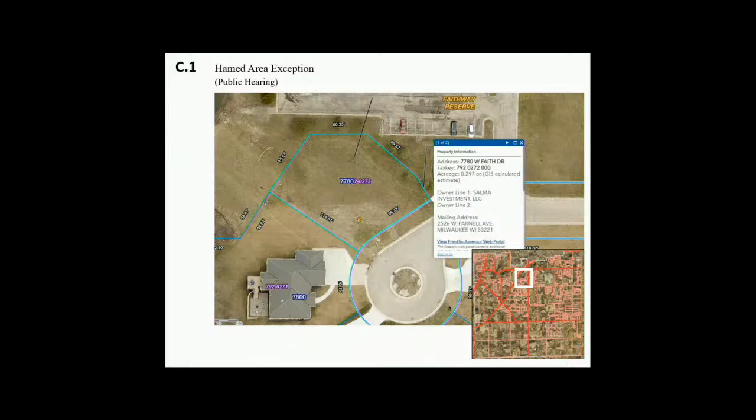And we do need your name and address for the record. My name is Wasim Hamed. The address for now or for the property? The property is fine. It's 7780 West Faith Drive, Franklin, Wisconsin.

The coverage is going to be for the deck. The deck is about 180 square feet, not too big. We have a barn behind the house, it's for us and the church, so we really don't have a backyard to sit at. We need something to sit behind the house, because the ground behind is sloping down for the barn, so there's no backyard, basically.

So fair to say, just for your own family purposes and entertaining others? For family purpose, because there's no backyard, basically. That's all. Thank you. Okay, thank you.

Any other questions or concerns? Okay, Mr. Martinez, do we have a motion? A motion to recommend approval of an area exception to allow for an increased lot coverage of 27.8% for a proposed single-family dwelling, exceeding the R6 as of right lot coverage of 25% for property located at 7780 West Faith Drive. So moved. Have a first, have a second?

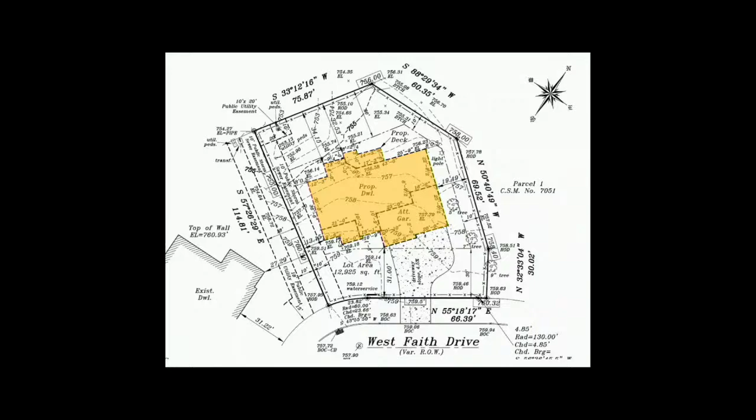All right, then moving on to - apologies, Mayor. What's the meeting date for BZBA, Mr. Martinez? So will this be on our February 22nd? Sorry, the 21st. February 21st will be when this goes before Board of Zoning and Building Appeals. So we'll see you then.

The next meeting is the Board of Zoning and Building Appeals, which is effectively the final approval for your deck. I'll be right here.

All right, then we're moving on to business matters. D1, Croatian Park Pavilion Site Plan, request for approval of a site plan amendment application to allow for the development of a new pavilion to replace the existing stage pavilion and other existing buildings in the northwest corner of the park upon property located at 9100 to 9140 South 76th Street, tax key 884-9995-000.

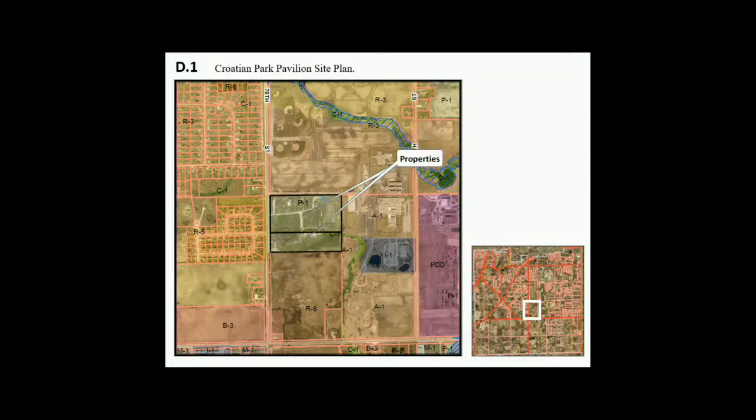Thank you, Chair. So this is for Croatian Park. The property is zoned P1 Park. It's located immediately north of the new CarMax development, near the intersection of Ryan and 76th Street. The existing conditions - it's important to touch on what's already there. Currently there is an existing pavilion. This is not really a change of the way the park is being used; it's a consolidation of the existing facilities and addition of some amenities.

So this proposal tonight is limited to the pavilion development. There are discussions of, and previously approved resolutions for, a turf soccer field, which approval has expired, and a future approval would be required if they wish to develop that. We'll talk a little about how the park is being used tonight, but I want to note that this application is focused on the pavilion itself.

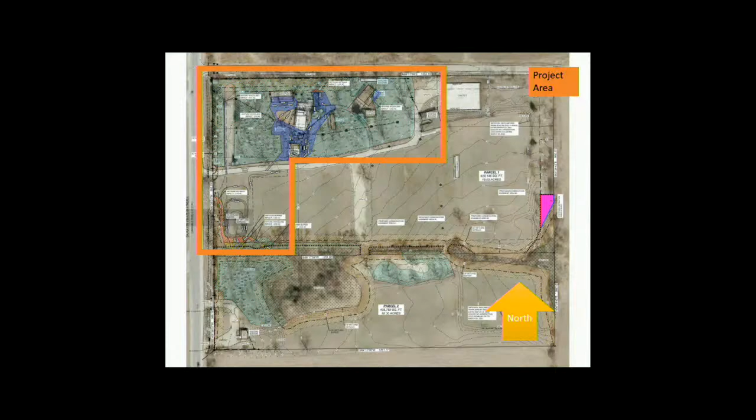So the Natural Resource Protection Plan is here for you and was in your packet. This is the proposed site conditions. We'll look at a detail of this momentarily, but there will be a new pavilion roughly in the middle of the project area, again in that grove of trees, to accommodate just under 300 people.

There's a discussion of parking requirements, and I note that parking requirements are generally driven by occupancy, or the number of people you expect to be using a facility. This pavilion has a capacity of approximately 300 people.

There's a fire pit proposed. The fire department did not have any concerns or commentary about this. There's an additional bocce court, additions to buildings, and then a bathroom which will have a deck on top of it. And again, the stormwater pond.

Let's take a closer look, just so you can see the detail. This is an existing parking area that is unimproved. At this time, it is gravel beneath the trees. All of the parking facilities on the site are unimproved, and we are requiring that this be improved as part of this site plan approval.

The Unified Development Ordinance does require that a surface be paved with curb and gutter. The applicant has already included a curb and gutter in the installation of their stormwater facilities along the western portion. But in order to make good improvement on the overall conditions of the site, we are expecting that they will improve this parking area as part of their overall development.

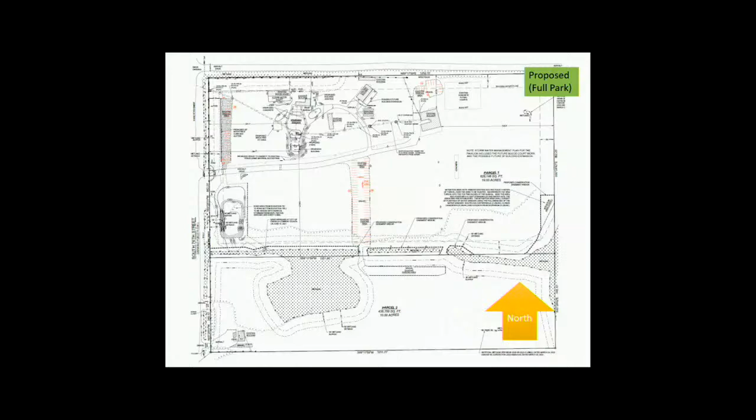There has been a lot of discussion in the city lately about sound. There will be an amplification system for the stage that's here. The applicants have provided us a basic sound study for this and are able to limit the overall volume to within what is allowed by the zoning. So we don't have concerns about that, but we're noting it for the discussion.

Just to note again, there's a previously approved but now lapsed site plan approval that may be coming forward. So recommended conditions of approval are the conservation easement, improvements to the parking facilities, and that conservation easement will have to go to Common Council for acceptance. There are also some minor technical corrections to the site plan - some dimensions that are missing. So broadly speaking, it complies with the requirements of the UDO.

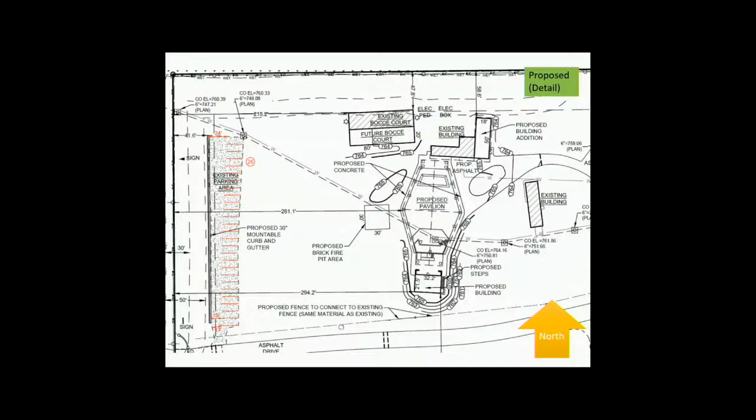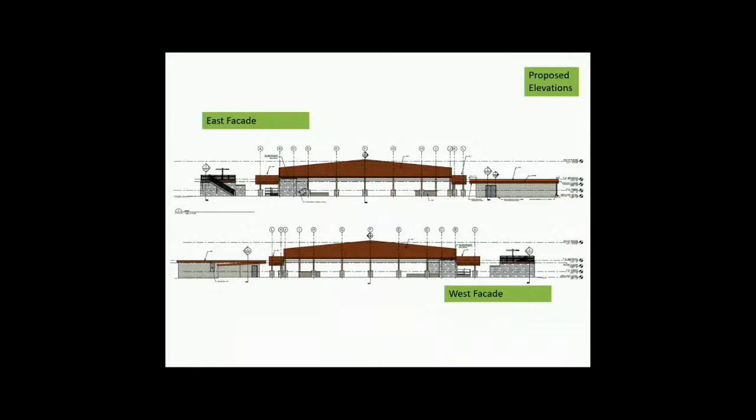It's actually a really attractive building. If you'd like to take a look, we've got the facades from the sides, the east and west. There'll be a nice red roof and stone facades. Overall, it's a good design. We think this is a great project. We just want the parking to look better. So, any questions?

My concern with, you've already addressed the gravel, but my concern with the number of parking spaces, the pavilion that you're building now, roughly 300 folks. Is that more than the current one that you have, capacity wise? Is this increasing capacity? It's basically keeping it the same, and we have more area coverage now for inclement weather.

Okay, and because the other pavilion was smaller, right, you could still have the same number of people, but not under cover. Now they're just under it. And we had a separate weather shelter as well. That's going to become the bathrooms and the deck.

Okay, and then for, Chair, could we get name and address for the record? I'm sorry, Tom Kuzmanovich, 5671 Francis Court, Greendale.

I'm the president of the Federation of Croatian Societies, the applicant. And my name is Tony Zanin from Pinnacle Engineering, 20725 Watertown Road, Brookfield. I'm doing the civil survey project.

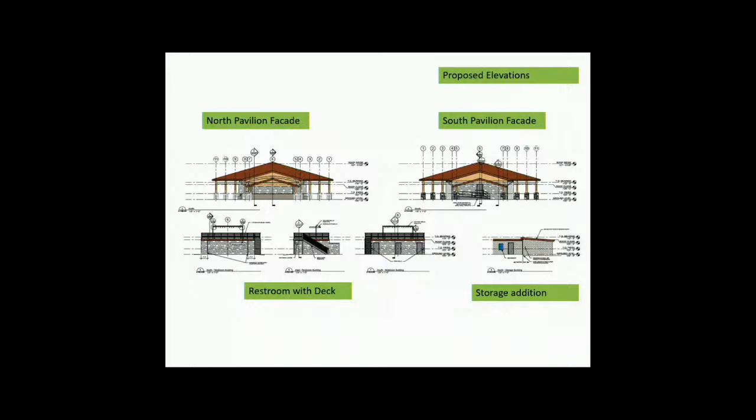I want to say thank you to the commission and our aldermen for supporting us as well. Thank you.

All right, moving on to D2, Rural and Urban Areas Map Update. Proposal to redefine the rural and urban areas as provided in ordinance number 85-860, regulating truck parking and raising animals. This is Mr. Martinez.

The rural and urban map in the municipal code is used to regulate sections for raising animals and parking trucks and equipment. For example, an owner located in the rural area may obtain a permit to raise horses, goats, or sheep, but this is not allowed in the urban area. This is the map we currently have in the municipal code; it was adopted in 1986 and hasn't been updated since. The municipal code has a section allowing this map to be revised from time to time, so staff is recommending an update of this map.

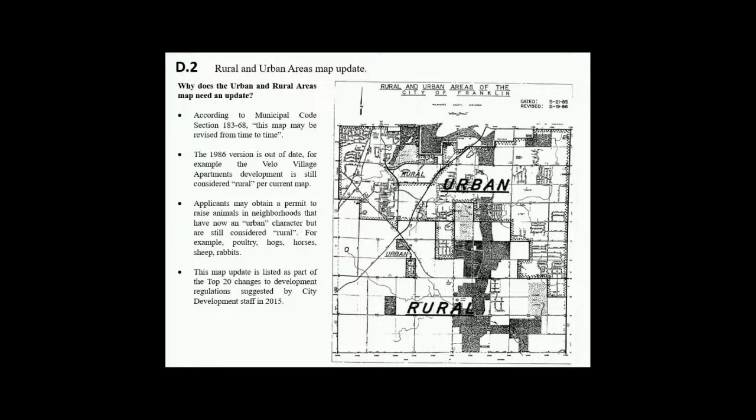We can see, for example, that the new apartments at Velo Village, per the current map, are still considered rural. Property owners in new subdivisions, for example Ryanwood Manor, Cape Crossing, or Park Circle, are also still considered rural, which allows for animal permits to raise horses. That's why staff is recommending the update.

So what's the criteria that staff is using to redefine the new or the addition of urban areas?

Basically, areas served or close to a public sanitary sewer or public water service, new residential subdivisions, and planned development districts are recommended to be added into the urban boundary. Rural areas not served by sanitary sewer and public water, and rural-oriented districts such as the agricultural district, prime agricultural district, conservancy, floodplain districts, park district, and conservation residence district, are to be kept as rural.

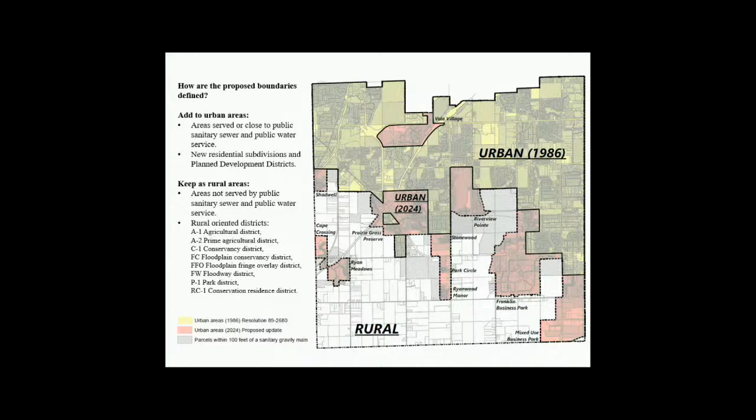So no public hearing is required at this time for this update. Happy to answer any questions you may have, and this will be the map that will be part of the resolution.

Commissioner Haley: Thank you, I just wanted to verify this is the map we're approving. This was the work product that helped us get to this. Correct. So we're not adopting this? Correct. There's some issues in here with areas within 100 feet of sanitary sewer.

If you look along 116th Street on this one, it's showing it hatched because technically that one mile long linear parcel does touch Ryan Road, but the whole rest of it is not, and it's not developable because it's 70 feet wide. Okay, I'm good with that then. This is it.

I just had a quick question. How will staff use this document versus all the other documents that you have? I know animal licensing is one part of it, but since there hasn't been an update since 1986, is a document like this important? For the enforcement of the animal section, yeah, it's important. Okay, so that's the main focus, the animal section, okay.

Do we know offhand how many people's homes would be reclassified from rural to urban that may have an animal that's no longer permissible? We review for active permits. And there's only one active permit. Got it, all right.

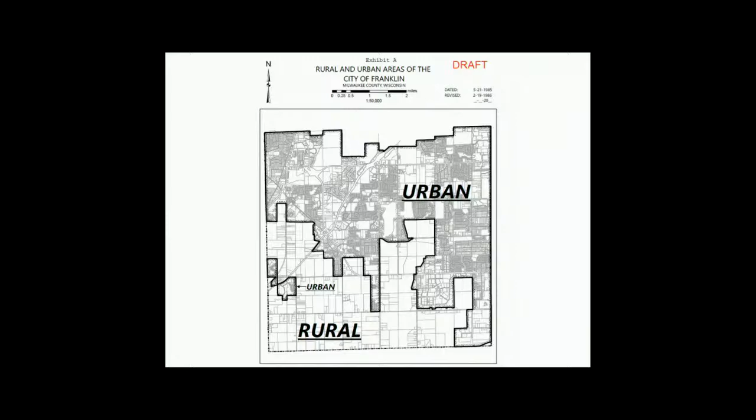All right, moving on to item D4, Franklin Public School District Site Plan Amendment. Request for approval of a site plan amendment for a building addition, parking lot, landscaping, lighting, soccer fields, playground, detached storage building, and stormwater management facilities upon property located at 8225, 8255, 8429, and 8459 West Forest Hill Avenue, tax key 838-9978001. And that is Mr. Fuchs.

So, the Franklin Public Schools has a site plan application. There is a fair amount of modifications to the site: the building addition, new parking lot, multiple soccer fields, a playground, storage building, and some walkways throughout. I'll first note that within the plans, the applicant has alternative bids they'd like to choose from as they get bids for the project.

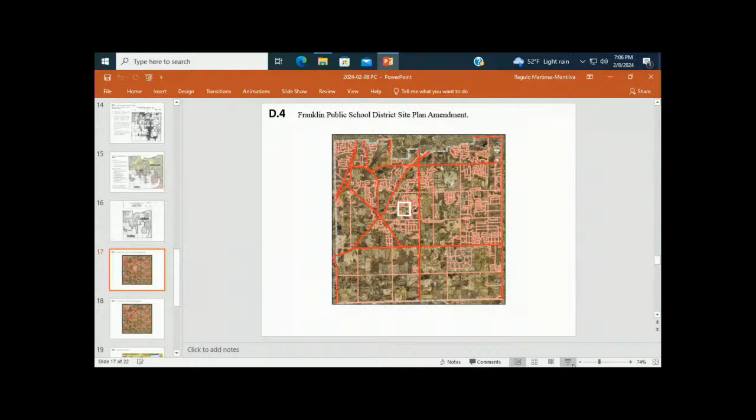Staff has decided to include a condition that those bids be reviewed and approved by staff, and as long as they're in substantial conformance with these plans and those alternatives, they'd be approved. Anything else would then have to come back to the Plan Commission.

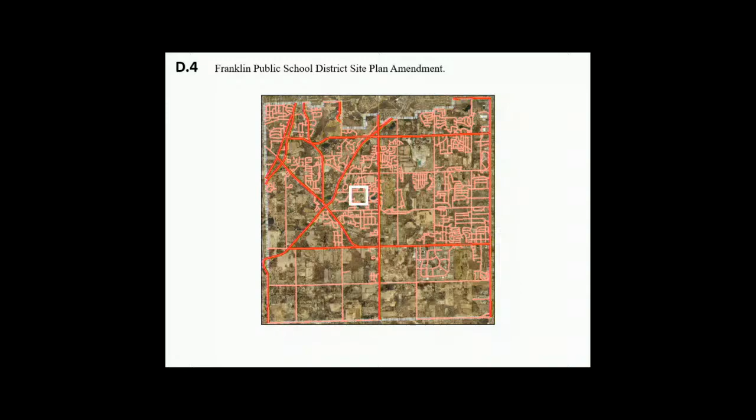The plans also show boardwalks in areas that impact natural resources, wetlands, wetland buffers, and setbacks. Those are not proposed at this time. They provided a note on the site plan, and there will be some corrections made to ensure all of those improvements are shown as not part of this phase. There's a condition that if the school decides to move forward, they'll have to apply for NRSE along with those improvements.

I'll go through the site plan and some of staff's suggestions and recommendations. There is a black vinyl chain link fence with slats around the storage building and soccer field area. Staff's recommending that be a decorative fence similar to what's proposed around the playground area. The building addition as a whole, with the alternative bid, is 15,638 square feet. The parking lot proposed has 122 parking stalls, and staff is not objecting to that quantity.

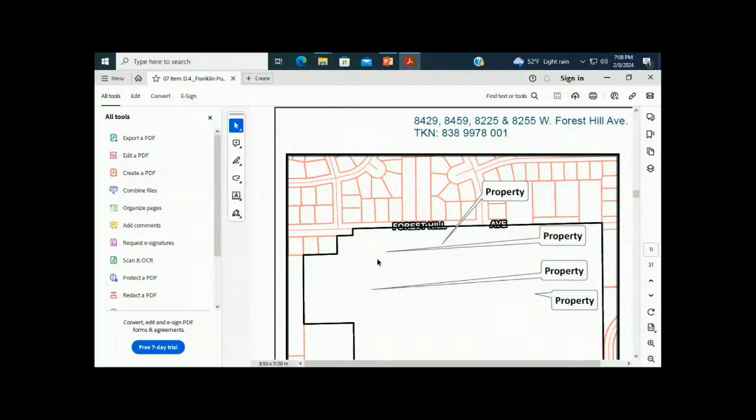There was a conservation easement approved in 2017. That easement has a condition that it be revised, since there were some changes to wetland areas—a wetland actually no longer exists on site, confirmed by a DNR assured delineator. So they will need to revise that conservation easement for the entire site and have it reviewed and approved by the Common Council.

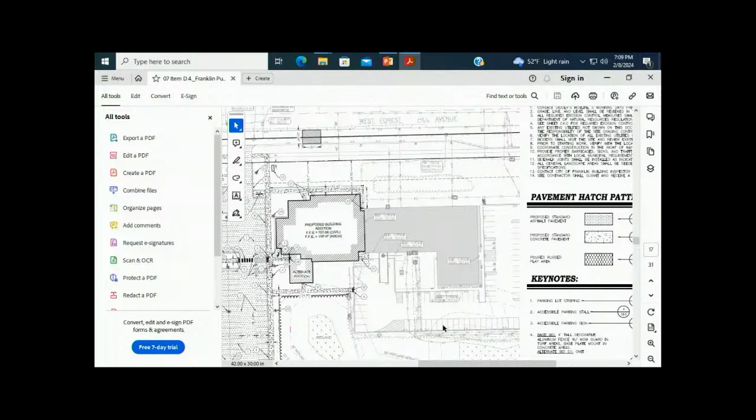Regarding lighting, staff did have some concerns considering the site is adjacent to single-family residential uses. There are 15 light poles within the parking lot at 25 feet. Staff asked if they were dimmable and whether a lower height was considered, which they did, but the applicant pointed out there'd have to be more lights to provide the lighting they're looking for. So just to note, they're not dimmable lights.

The soccer fields are not illuminated. There is a longer response from the applicant regarding the lighting in the staff report, trying to address the glare issue that was brought up. Staff was also concerned with the view of that light source from the adjacent residential neighbors, but the applicant's lighting consultant provided a response and doesn't believe it will be an issue.

The playground is adjacent to the two smaller soccer fields off of Forest Hill Avenue. It's surrounded by a 4-foot aluminum fence. The storage building is then on the other side.

This is adjacent to Forest Hill Avenue. Staff made a comment that the building be relocated, perhaps to the south of the soccer field, so it's not right off the public right-of-way, off the road. We also recommended that metal not be used as a primary building material. So relocating it is a suggestion, as well as the building materials noted in the staff report. Again, the applicant did provide responses that are in the report.

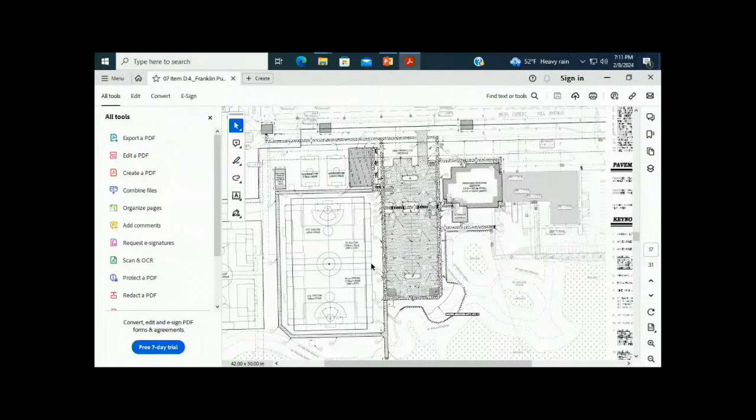Oh, and sorry, I did pass out an email from a neighbor. It's the property to the west, the larger parcel, maybe about 5 acres. They have several concerns with the project, which they noted.

Excellent. I thought that would be bigger. Thank you.

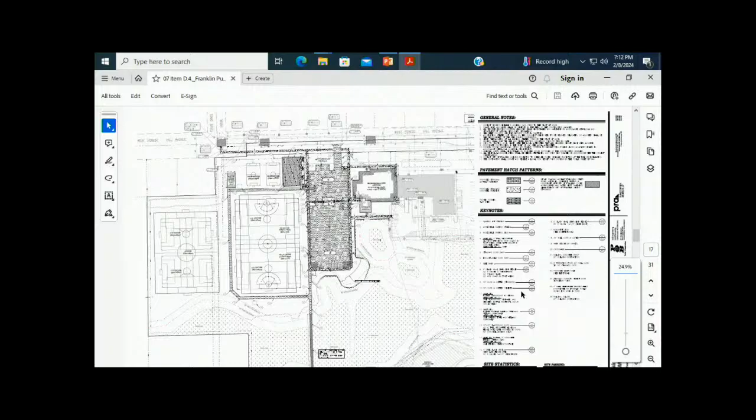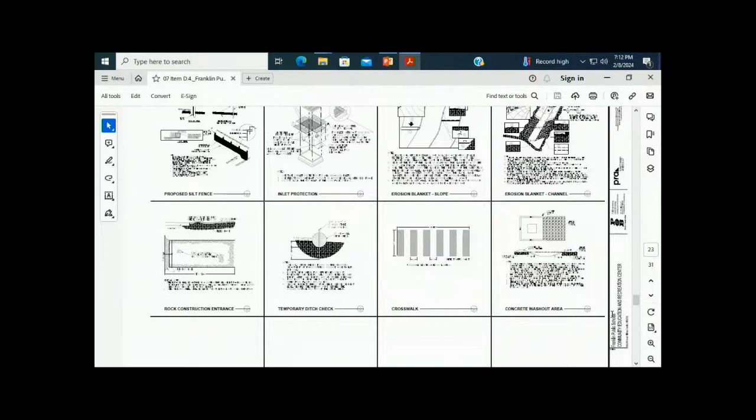And Mr. Fuchs, is that the end of your presentation? Yes, sir. I do know there are some folks from the school district in the back. Would the commission like them to come up for questions? Yeah, I think a presentation would be appropriate. So if the school district and architect or developer, whoever is here, would be willing to answer questions, please provide your name and address, and add anything you'd like to the presentation.

Hi, my name is Devin Kack, 209 South Water Street, Milwaukee, Wisconsin, with Plunkett Raysich Architects. I'm here on behalf of the school district. I think the presentation was done well. The only thing I'd like to add is that the school district did meet with neighbors on two occasions, and we reviewed and tried to respond to as many comments as possible. The other emailed responses came in this week, and we were able to respond directly, I believe, last night.

I'm Andy Cromie, Assistant Superintendent for the school district, 8255 West Forest Hill. The major reason for the building is we have very limited space for daytime programming for our rec department. We currently hold a couple of classes at Ben Franklin Elementary, but given our heightened concern about having people in the building who don't need to be there during the school day, meaning children and staff, we're trying to find and develop appropriate space to serve our youngest kids and our post-work-age individuals with daytime programming, attached to an existing facility we have.

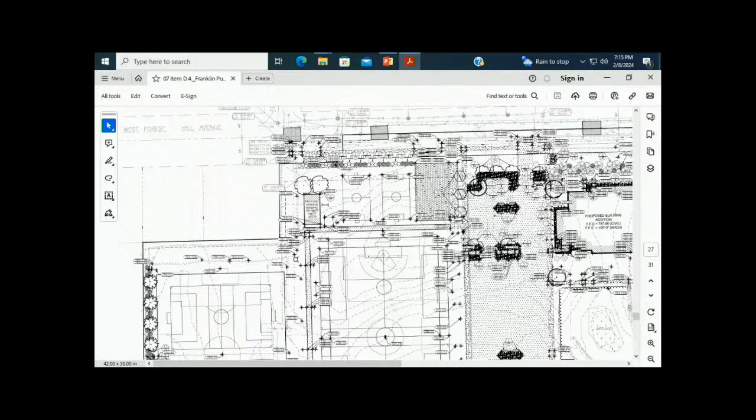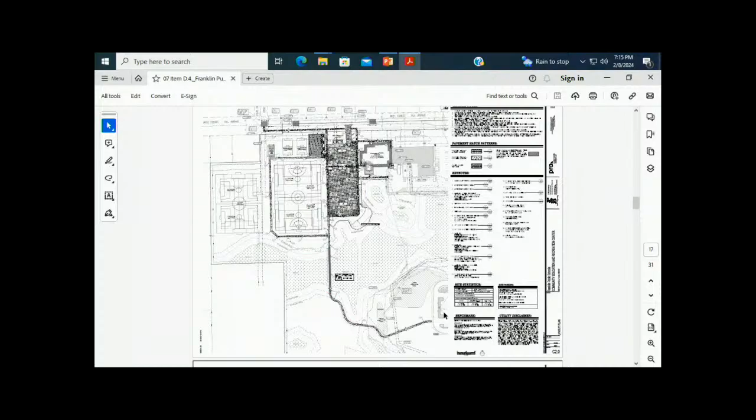Commissioner Haley: I think two questions. One, there are views and plans shown for an alternate clinic—can you explain what that is? That would be a health clinic for our district employees and their families, designed to improve our overall healthcare spend and provide better quality of care for those employees. It's not atypical—I've been part of two districts where we developed an internal clinic, West Allis and Oak Creek, where we had an on-site health clinic.

Okay, I'm not quite understanding how that's critical to the mission of education, but I can see where it's a nice amenity. Well, our healthcare spend is about 12.5% of our total budget, so finding a way to smooth that out over time is critical to the mission of educating kids. And that's if the bids come in right and you've got enough money for it? Correct—if not, it doesn't go forward, or in the future it'll come back. Possibly, possibly not. Okay.

And then, going through all the documents, I'm still not clear on what we're doing about this path supposedly to the south, the boardwalk through the woods. There are wetland impacts that probably don't need to happen—where are you on that now?

Is this what you want to do, or are you coming back with the revised resource protection plan? I'll bring up our civil engineer, but really the intention is to provide as much parking option for staff. The no parking signs along Forest Hill, we're appreciative of, but standing cars there is a major safety hazard. Providing other options leading up to our back parking lot at the middle school is the rationale for the pathway, but I'll have our civil engineer speak to the specifics of the path.

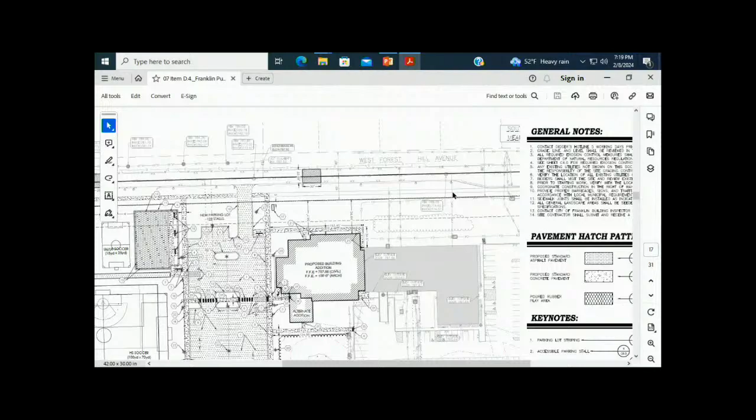Agreed. If the funding isn't there for it, then what happens in terms of accessing the parking lots? You can access from sidewalks to the north and to the east. I'm not sure if you can see that further, but there are sidewalks to the east that could potentially be used to access from the district office's existing parking lot. Or is there possibly an alternate route that goes south of the district offices?

I see there's one path with less wetland impacts, but is there some way to utilize those walks that are there? Which walks? Somebody's pointing at one. There's others in front of the building. Yes, so those walkways could possibly be used. The public walkway there is already making a direct connection, it's just a longer walk.

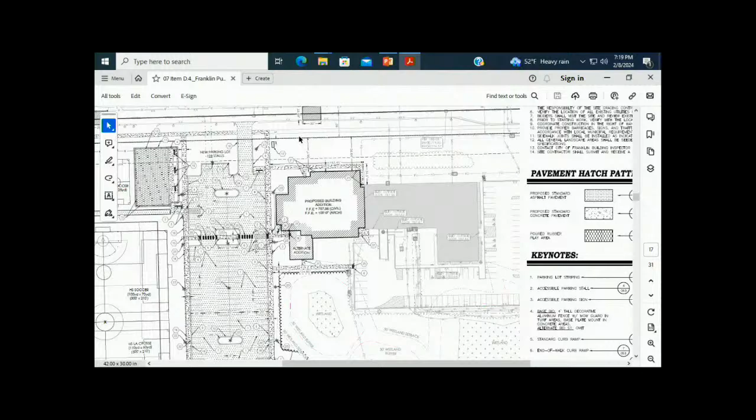One thing, and I'm not going to get into too much detail, but the boardwalk plans that were put together, I'm not sure if that pier system is kosher with the DNR. We have reached out to the DNR regarding the 4x4 posts on a wooden plate. Yes, we have reached out to the DNR, and they have approved that design. In the DNR's opinion, that is not considered to be a wetland impact.

Basically, the boardwalk system would sit on 4x4 posts with a 2x10 across the length, and that 2x10 would sit on top of the wetland. So in the DNR's opinion, that would not be a wetland impact, and the DNR would not require a wetland fill permit. Great, I just wanted to make sure you weren't getting caught up in that quagmire, now's the time. Yes, the wetland boardwalk design was actually from a local reserve in Stevens Point, where they've used that design for years and recommend it.

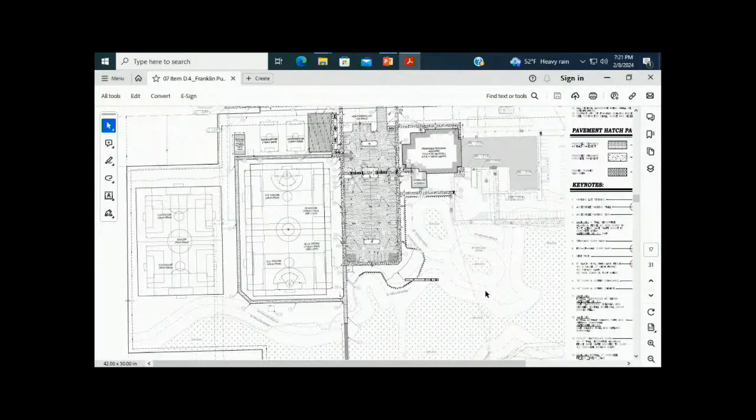There's a lot of soccer fields. Well, where are those programs being held now prior to these being built? We do have some younger soccer programs at our elementary, specifically Robinwood, but for our larger soccer field, those students travel outside through our rec program and play in other communities. We don't have opportunities to host games for them.

Okay, will the high school be practicing or playing on these fields? I won't say that they won't practice, but they will not play games there.

We have a competition soccer field at the high school. I don't want to say they'll never show up and practice there, because I can't guarantee that. But I noticed you have a storage building there. Are you budgeting for maintaining these properties and fields, keeping them in good shape? Because it's a lot of work.

Yep, that's all accounted for through our recreation department. And I'm sure the neighbors want to see all this in very good shape too. We very much do want to see it.

Commissioner Lowe? I have several questions, but first, I do see some members of the public, so is there anyone who would want to speak on this matter? If not, I won't suspend the rules, but is there anybody who came here tonight to ask questions about this item?

Okay, not seeing anyone. Oh, there is someone, just raised their hand. Okay, sorry, before that—

Motion to suspend the rules to allow for public comment on this agenda item, reminding folks that we need their name and address for the record. Make that motion. We need a second and a vote for it. Second. Barry Wysocki, just one moment please. Okay, I have a first and a second. All those in favor? Aye. The motion carries. If you could state your name and address for the record, and please try to keep your comments to about 3 minutes.

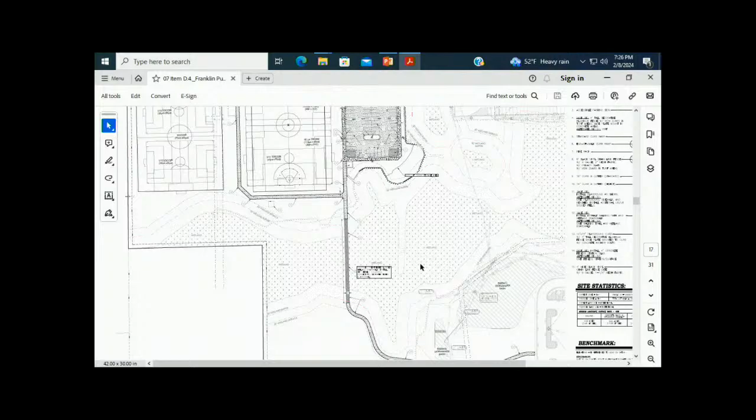On this proposal, somewhere it says—I think it was the engineering notes—staff recommends providing a minimum 2-year plant replacement guarantee, and staff recommends buffer yard planting shall be maintained in perpetuity. I'm not sure what a buffer yard is, but I mentioned in my email that the school board should maintain all the plantings and trees in perpetuity, forever. So that's one comment I had.

Mr. Fuchs, you mentioned something about the wetlands changing, that there's a wetland that's not there anymore. I wasn't aware of that—where is that wetland that's gone now? What was a wetland that is not a wetland anymore?

It was in the area of the building addition. Okay, all right. Is that wetland marked, like there's black tubing all the way along the back? Is that the wetland marking when you walk the property?

I'm not aware of it being marked on the site. There's like a black tubing, it looks like it's marked with that black tubing, but I'm not sure what that tubing would be.

As far as the playground, we would prefer not to have one. In the emails today, a neighbor mentioned putting trees in front of the playground, and the response was they don't want trees there because they want the police to be able to patrol and see what's going on. So there's already a concern about problems with police and people hanging out there. Put another field there, put some more trees, leave the benches, make more green space. We are against the playground.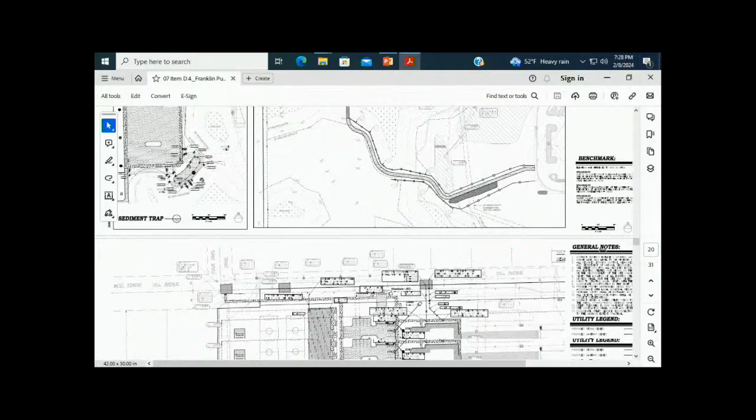I understand it's for the benefit of the community, but we live next door. We've been there for 30 years. We built a house, we dealt with the wetland and all the other Franklin rules, and now it just seems like we should leave that wetland alone.

In fact, the location of our house is there because of that wetland. We had to put our house on our 5 acres at that specific spot, which ironically is the closest to this whole development, because of the wetland requirements and that dead-end road behind us. So ironically now we are closer to this development than we would have been if we put the house where we wanted to.

Fencing, lighting, parking—122 stalls. I agree with the neighbor, that's going to be a huge amount of cars. 122 cars, so we're expecting a lot of traffic. If you've been on Forest Hill at school bus time, it's a nightmare already. So now we're going to add 122 more cars on the weekends when usually it's quiet.

So that's something else to consider—can we use that parking lot in the back and decrease the size of this one so there's less traffic on Forest Hill? And then the lights—I know you're doing your best to keep them as unobtrusive as possible, but there's going to be lights there. We would prefer no lights, but I guess we'll have to live with some.

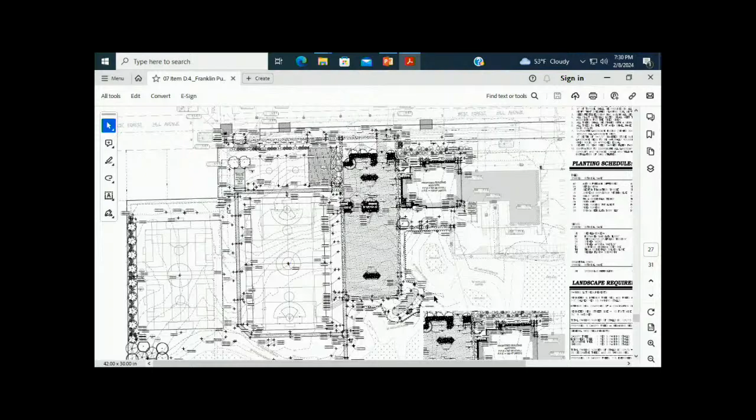Overall, I understand this is a good thing for the community, but it impacts the neighbors and the street. Forest Hill is a busy street as it is, so another 122 cars—I just can't imagine what the weekends are going to look like with all this traffic. Thank you, I went over my 3 minutes, I'm sorry.

Hello, hi, Cheryl Williams, 8424 West Forest Hill Avenue. My house is directly across from what would be the smaller soccer fields—we're the first house that faces the street from the corner of Four Oaks. I just wanted to go on record to show that I totally agree with Perry's assessment on the traffic flow. That's my biggest concern.

We already see a lot of traffic with the middle school, in the morning and late afternoon. This is going to be traffic all weekend, depending on what's going on, and having it at the controlled intersection would help them immensely. Already we see traffic backed up the street. So I guess I would just like to reiterate that traffic is a concern for us. Thank you.

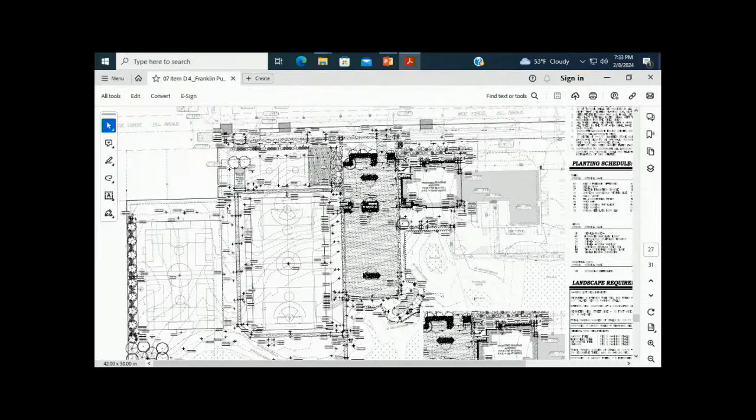Final disclosure, and this goes to a couple of the comments from neighbors about traffic. Absolutely a concern of mine. I have been driving that route sometimes on a daily basis for the past 3 years, and it's awful. And a lot of it is behavior of parents dropping their kids off. We understand the intersection, it's just not well designed for that, and parents do what they want and candidly put their kids at risk at that intersection out of a sense of being too busy. So that's a comment to the whole community, and anybody who's driving to Forest Park Middle School daily, this is for the record: don't drop off your kid and hold up traffic and have people trying to go around you because you think you've got a meeting to be to.

And the direction I go is on 83rd Street, so it's a little bit different from what you're talking about, but you all see it every single day. I'm facing that for about the next, let's see, my daughter's in 3rd grade, so she'll be there in about 6 more years of driving in there and doing drop-off. And I think everybody agrees it's a difficult situation.

So I do believe, my point on that is continued coordination with the Franklin Police Department. They have, at times, put cars out there literally to block people from some of that behavior. But I think it's going to take a lot of effort on the part of the district staff in coordination with communication, right? Effective communications from the district. Sometimes those communications are difficult to understand, I'll be candid on that. But also with the police department to get better controls there. I think that covers all my disclosures. Thank you for that.

Going to a question you got, Mr. Cromie, earlier about the clinic, you got that from Commissioner Haley. And I think what you were saying is that effectively for staff, having that clinic available would help recruit and retain staff at Franklin Public Schools. Is that a fair assessment? It certainly will do that, yes. Okay, and of course it has to come under the cost concerns that Commissioner Haley raised, but it does help retain staff at the district. Correct.

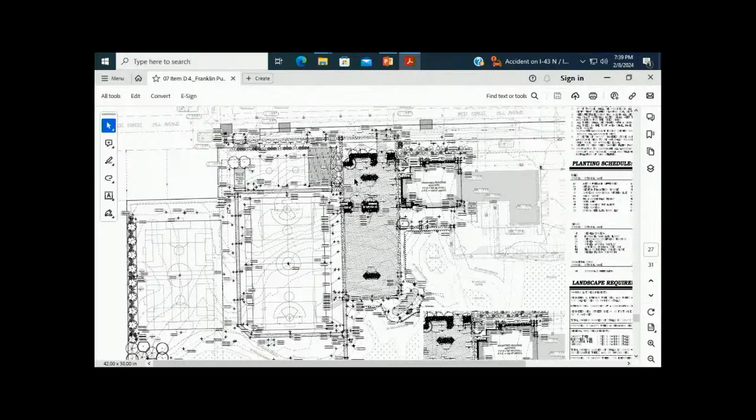When there are events at the middle school, that basketball court area is often used for overflow parking. Sounds like that wouldn't be the case in this design, since it wouldn't be suited as a play area—you wouldn't be able to use it that way. Correct, that area would have physical play structures for kids to play in.

I have just two more questions. One of the consulting folks with this application talked about addressing the concerns of neighbors—we had the neighbor immediately to the west, and you talked about meeting with the school board, but there were others. What was the result of that? Were you able to satisfy their concerns, and if not, what are the continued concerns neighbors have? We know about light and foot traffic on the walkways, but generally speaking, and maybe some specifics, what concerns were you able to alleviate for neighbors?

I'd say the biggest concern was the far west side, where you see the tree line. Our original plan was to put the same black slotted fence along that entire side. At the request of our neighbors, that was changed in favor of a tree line or plantings along that side instead of the fence, along with the ability to increase that buffer. So we slid the entire soccer field to the east—that was one concern addressed.

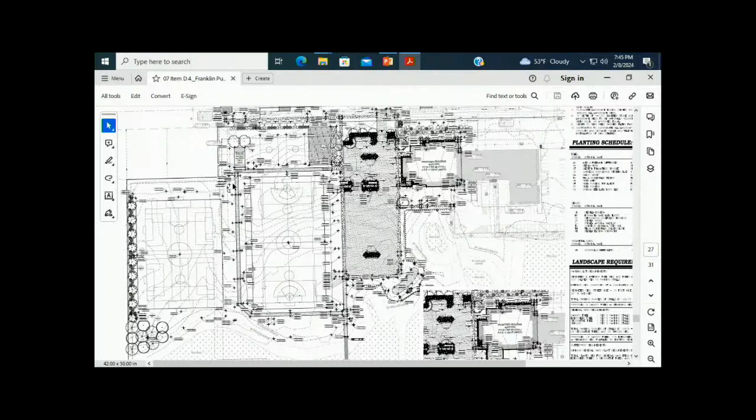Would there be any temporary lighting? What I'm thinking of is like at the high school, where when practices go on, they have temporary lighting, generator fed, so that when it's time to put all the equipment away, it's there. But that time could be 9 o'clock at night—probably not that late—but could be disruptive. So would you be using temporary lighting in that area? The intention is not to put temporary lighting up there. Okay.

Then I thought you just reminded me of one other thing, but I've lost it now. So I will yield back to the chair. Thank you. Thank you, Commissioner Haley.

Thank you. I understand what's going on. All said and done, it looks pretty good. I'm really concerned about the pedestrian automobile safety at the entrance to the parking lot.

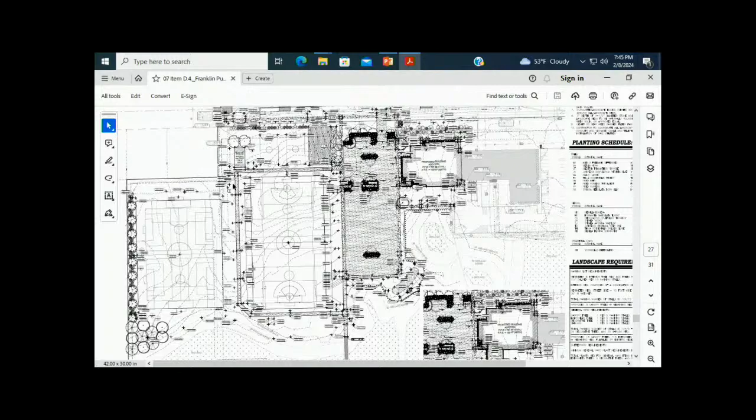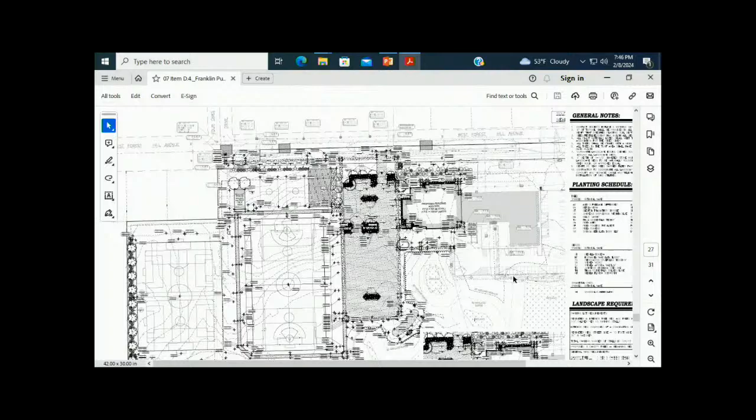Has there been any attempt to have discussions with the city engineer regarding traffic impacts? I mean, basically, you've got the existing entrance, which is a four-way with stop signs, and it's already, as we've heard, taxed. Now we're going to put another entrance a couple hundred feet away—it's a three-way intersection, left turns. I can see where this could be three to four times as bad as it is now because of the two driveway entrances. So I just don't know who's going to deal with these impacts. And three years down the line, when we're having problems with children and automobiles, I don't want to be revisiting it then.

I will suggest—I've been looking to see if there's an alternate solution. In theory, and one doesn't negate the other, but you could utilize the existing entrance and bring a drive-through that comes just—I've got it now—to the south.

Whatever, to the south of the existing administration building, it would go, unfortunately, right through your alternate location for a clinic. But there is a way you could still have this road. When times were busy, or if the city engineer felt there was a need to close that, you could force traffic east, where you've got four stop signs, and bring it in that way. So that's what I explained to Mr. Leon. We reviewed that impact and for a myriad of reasons have chosen not to move forward with that, again due to wetland delineation and the safety of people walking in and out of the office every day.

From a traffic standpoint, because my office faces right out onto Forest Hill, I think we're confusing the beginning and end of school day with what happens during the rest of the day on Forest Hill. For 40 minutes at the beginning of school, for 176 days, and 40 minutes after school, 83rd Street and that intersection is pretty rough. But for the rest of the time, Forest Hill is not a major thoroughfare of cars.

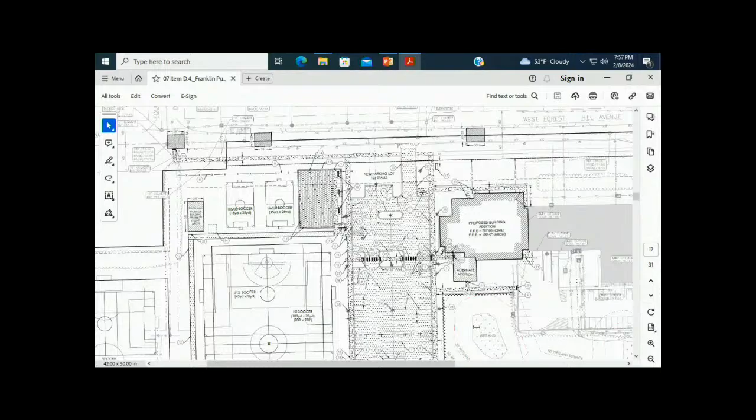The clinic itself has an opportunity to have 3 people per hour at max peak operation. So you're cranking it out and getting 3 cars an hour to use the clinic. That doesn't even matter from a traffic standpoint. But again, our classes aren't filled with 30 people at every particular level, and our major space is designed for 8 people during the course of the day, being pickleball with pairs on 2 courts.

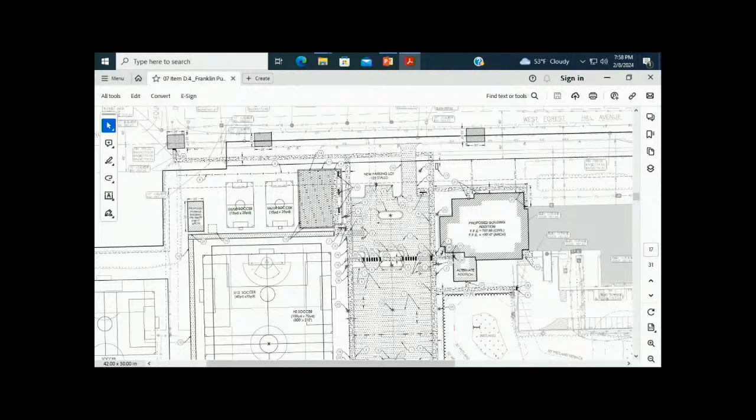Yes, one last comment, what I led with, and I'll finish with it. Although Assistant Superintendent Cromie addressed the issues, to Superintendent Menon and Chairman Sprague, when matters like this come up, be present at these meetings as the head of the school board and the district staff. Be here going forward, please. Thank you.

Further comments, Commissioner Haley? I'm trying to keep it simple.

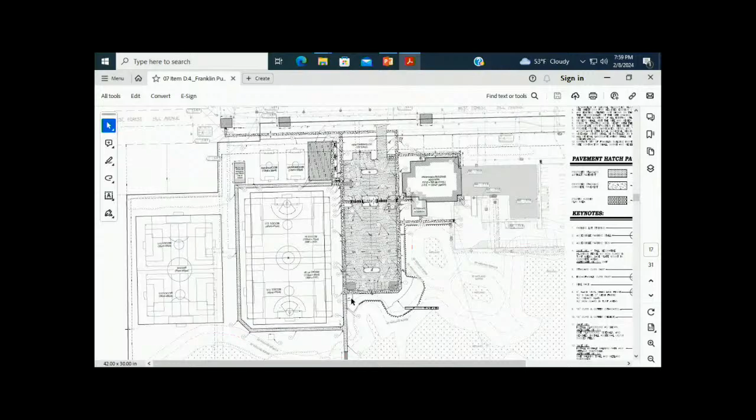We're being asked to approve the site plan. I have, and some other people have expressed concerns about safety and site flow, how it all works. One solution is for us to require a traffic impact analysis and an additional analysis by our city staff that have to deal with it. The TIA is just going to say here's where the problems are and here's what you could do. Somebody needs to come up with a viable solution. That's going to take time and that's going to take money. So meantime, we're being asked to approve this.

And I understand, because the next things I'd hear are that you're putting this out to bid, you've got a fixed budget, you need to get those bids back so you can decide what you're doing. So I'm trying to think of a way we can make this work and address what I believe are safety concerns. There's a playground here, people will be coming all throughout the day. You're creating an activity node, this is a park, and that's what I used to do. All I'm asking is how can we make it safe, so that we all know it's safe, not based on well, we think the scheduling and there'll only be so many people. Sometimes on sunny days a lot of people come out. So I don't want to hold the project up, but we don't have the answers, because even if we require the TIA, it still has to be done, and then we should be looking at that to see if the issues are being addressed.

As I said, additional review and comments from staff would be critical. I'm at a loss as to how to move forward. Right now I'm tempted to just deny it or lay it over so you can get these answers and come back, but that's not what I want to do. I just want to make sure the safety of Franklin citizens is being taken care of here. This is more than just about buildings and parking lots.

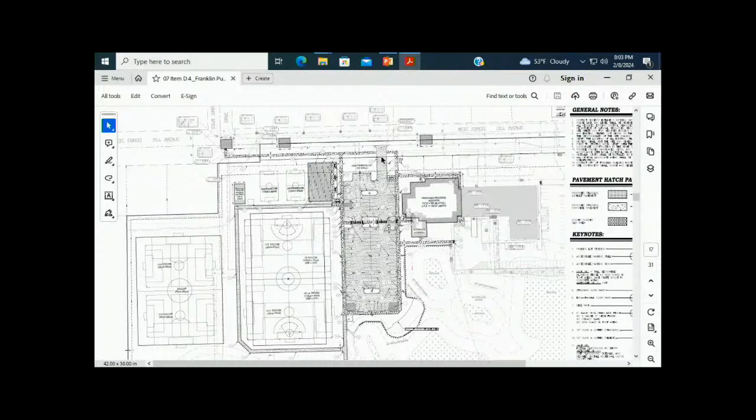Ed Hofer, 8058 South 77th Street, Franklin. It's been mentioned that the drive to get in and out of the parking lot was moved to line up with the neighbor's driveway and garage to avoid the lights. But I can anticipate there will be times where it could be quite challenging for them backing in and out of their own driveway when there's all those cars coming there, especially with the traffic that's already there. So if you're going to look at the traffic, I would ask that they take that into consideration as well. Thank you. Thank you, Alderman.

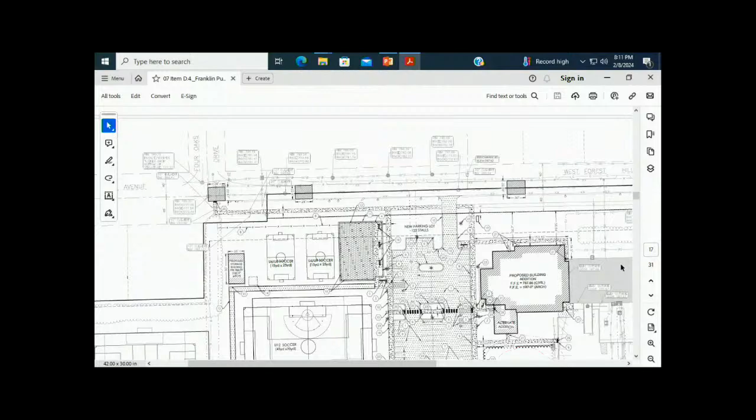Item D5, Forest Home Commercial Condominium Plat. A request for approval of a condominium plat for property located at 11217 West Forest Home Avenue.

Tax key number 748-9961-001. Mr. Fuchs: this is a condominium plat for a commercial property. They'd like to create five separate condominium units within the existing building. There are no site or building changes proposed, so this is really an ownership change for the building. I believe the owner intends to sell the individual units. Staff is recommending approval.

Thank you. Any comments or questions from the commissioners? Seeing none, do we have a motion? So moved. Sorry, my bad, I should listen first. I had to find it.

I withdraw that. A motion to approve the condominium plat for the Forest Home Commercial Condominiums located at 11217 West Forest Home Avenue, subject to the conditions in the draft resolution. So moved. Second. I have a first and a second. Any further discussion? Okay, all those in favor? Aye. Opposed? Motion carries.

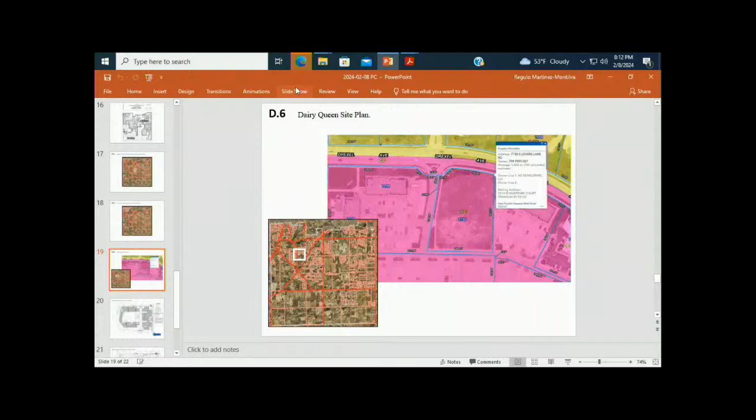Item D6, Dairy Queen site plan. Request for approval of a site plan for a new Dairy Queen for property at 7730 South Lovers Lane Road.

Mr. Martinez. Good evening, I'm a new face around here. I'm the new associate planner for the Department of City Development. Nice to meet you all.

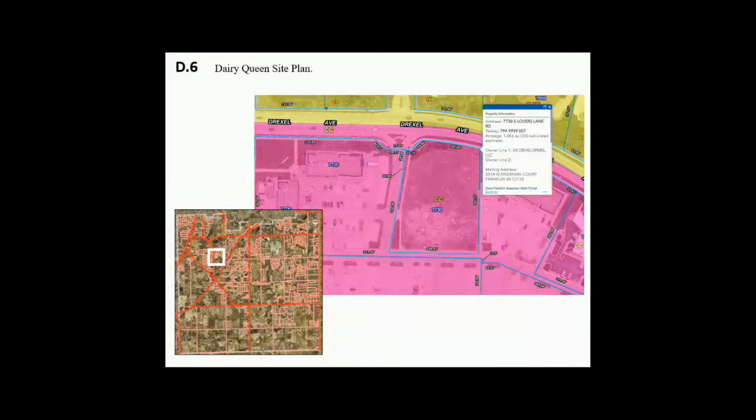This project is for the development of a multi-tenant commercial building, specifically three tenants. The lot is currently vacant. The proposed building on the site plan is approximately 8,300 square feet. There are 67 parking spaces. There is a drive-through for the proposed Dairy Queen. This has previous special use approval. They also have special use approval for a second tenant as a liquor and tobacco business. The third tenant is currently unknown. The 67 parking spaces allow them to provide the maximum number of spaces for any general retail or restaurant use if needed.

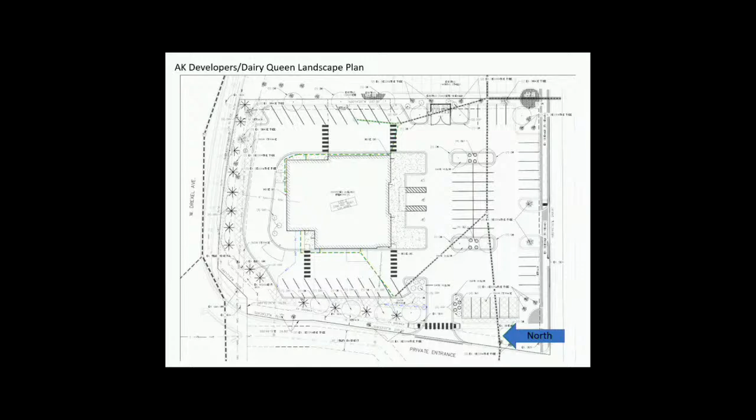As it concerns landscaping, there are existing decorative trees on the property that were not listed originally in the landscape plan. We have had discussions about that, and we have decided to add as a condition of approval that they provide the decorative trees and their species. On the original lighting plan, along this property line, they had exceeded the number of foot candles. But there is an existing lighting pole off the property that was contributing to that, so after further discussion with the applicant, we have decided to remove that condition of approval. We are recommending approval of the site plan, contingent on the resubmission of landscaping to be approved by staff.

Thank you. We have the applicant here - anything you'd like to add before we open it up to questions? Nick Fuchs, 2000 Fairhaven Boulevard, Elm Grove, 53122. This is a project I was representing the applicant and property owner on prior to coming on board, but I think Luke covered the site pretty well. The landscaping condition, we have no objection to - it's just going to be a matter of providing the species of the existing trees, which we can do, but otherwise the quantities are in conformance with the UDO.